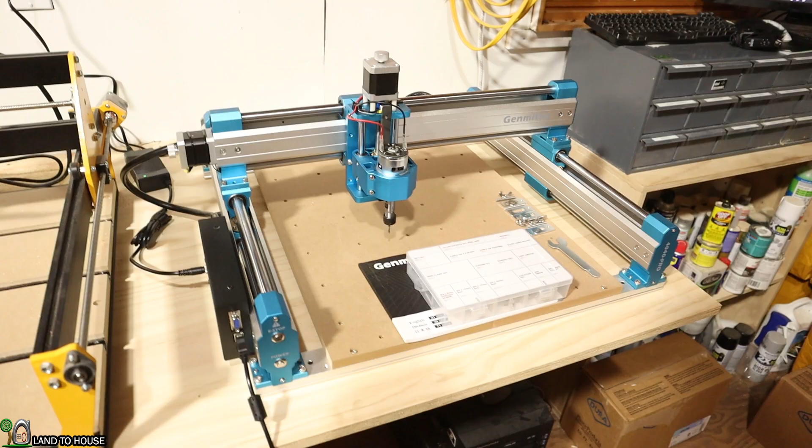Let's take a tour around this machine real quick. Now, some assembly is required. If you want to watch the assembly video, I'll have a link in the description down below where I put this thing together piece by piece. But let's go ahead and start off by doing a little tour around this machine.

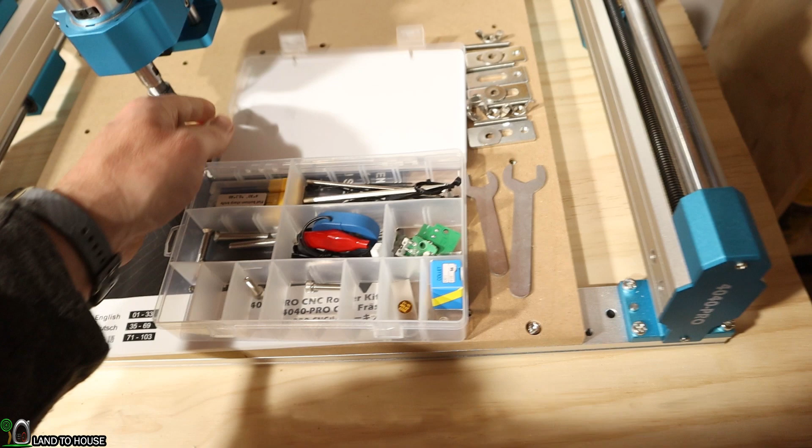So this is everything that comes with the machine. You've got some wrenches to adjust the spindle. It's also got some small clamps with various hardware needed to go into the MDF here. It's also got a little kit that has lots of goodies inside. Now I had all the hardware to assemble this. It's got some longer bolts, some different bits. You've got a Z probe and another collet and some more limit switches there. But the kit is really nice.

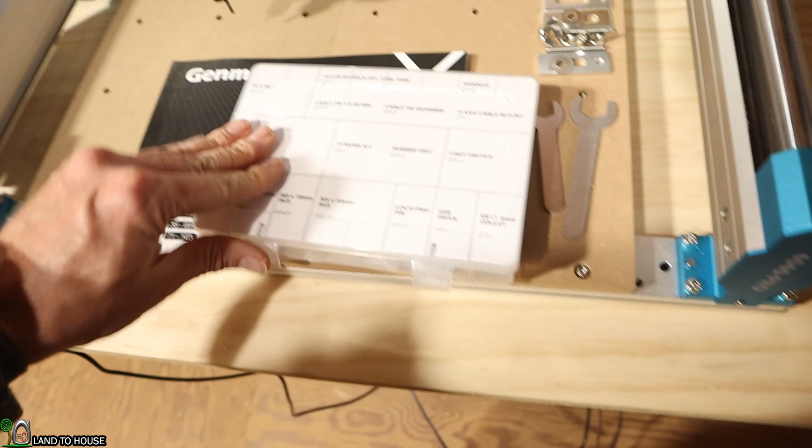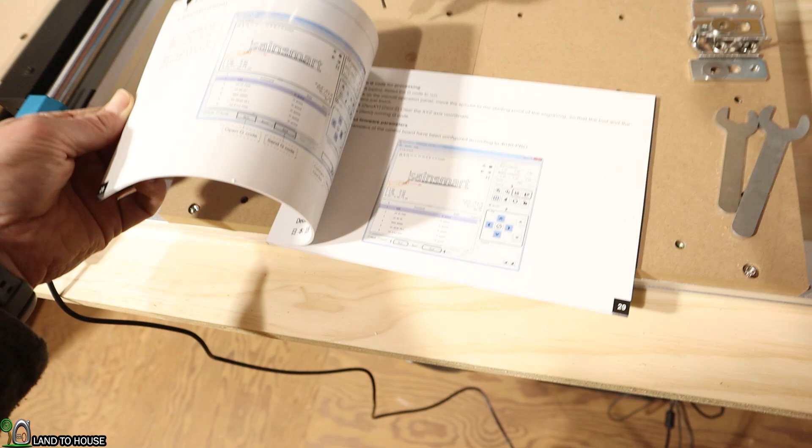And another thing that is really nice is the user manual. It's probably the cleanest I've seen in a while for an assembly, and it has nice color pictures that show you step by step how to get everything assembled here. It also has the how-to for getting all of your software installed, and that process was pretty easy as well.

Now I have another CNC machine over here that I had to unplug before this one would be picked up by Easel, but it is now working just fine.

So the only thing I don't really like about this machine so far is that the included clamps are rather small and a bit difficult to work with, since the MDF here has spaced these holes, and you can't always lock down the material you need with such a small clamp. But other than that, it's quite nice.

Let's take a tour of this CNC machine, starting here with the front right corner. This is the 4040 Pro model, as you can see written right here.

So to begin with, down here on the bottom, you have your front module, and then back here on the back, there is the back module. The only difference is the back module has the wiring in it, so you can connect to those stepper motors.

So in order to get the unit square, there are these pins that drop down, and that allows the two sides of the Y to fit down in there and make a nice square and level fit. I had 16 of these bolts go in there to hold that into position, and it was quite simple to get installed. If you'll notice, there is a glide rail on top and on bottom as well, which means this machine definitely slides very true to square.

It also hides that threaded rod down there, so it's hard to get anything to it. So it won't be binding up anyone's finger anytime soon. Definitely don't want to do that.

So on top of the two Y modules, you have got your X, and the X just has the same four bolts here on the side, same type of rail system, and it goes over here to this side.

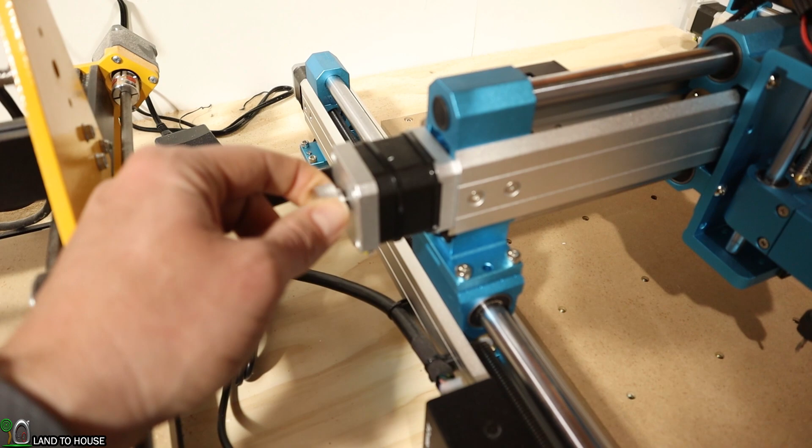Now you'll notice there is the stepper motor here, but it has a manual jog wheel on it, which is very handy if you need to adjust this out of the way while the machine is off. That same type of jog wheel is here on the Z-axis and also available here on both sides of the Y. You'd have to have both hands free to do that.

Moving over here to the Z-axis, the wiring on the spindle is kind of open, and it'd be nice if that were covered a bit, but so far hasn't been any problem. So this kit does have the wrenches here that you can use to adjust the spindle down there to replace the bit if you need to.

The unit does also have limit switches, so if I look up under here, you can see this right here is a limit switch. There are also limit switches on the other axis as well. Kind of hard to see, but there's one right down in there, and there's also one on this side over here. If we move over here, there is an E-stop up here which will turn the machine off, and also the power button down here.

Then you've got your control board over here on this side, which is perhaps a little bit awkward of a position. It'd be nice if this were placed back there in the back, because I like to keep my cords not hanging off the front of my work surface.

I like to have them back off the other side of the table so I don't brush into them. But as far as wiring goes, it was quite simple. Just had to hook up the spindle up here, had this limit switch, and also had the stepper motor there. Stepper motor is controlled up here with this. And then on the back, there are a couple of little wires that connect everything down there on those Y modules.

So, very nice machine, well built, and seems like it will do very good here in the future. You can replace this spindle with a bigger mount, so you could place something such as a Makita router in there if you want to step this up to a bit more power.

The Z probe would go into this connection right here, which is a bit awkward if you're going to be using that often, which most people are, and that cable is going to be sliding back and forth. You may have issues with that getting caught by the machine and torn up. So it'd be nice if the plug here were a bit more convenient to pop in and out, and not that style. Perhaps we'll see an improvement to that as this company moves forward.

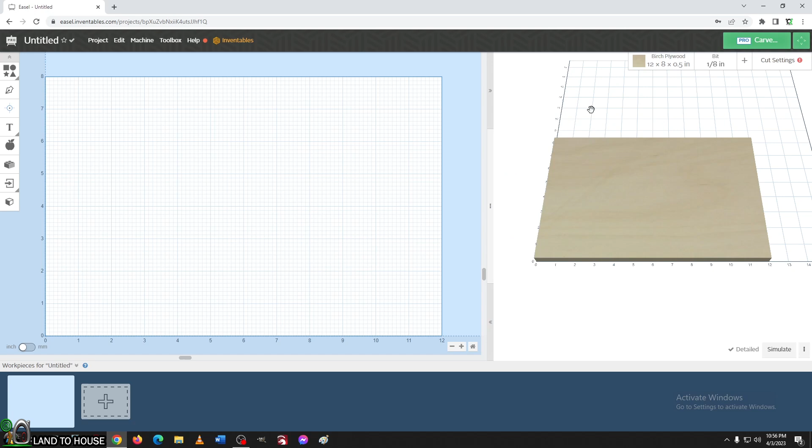Okay, now that you've seen the machine, let's go ahead and run our first project. I'm going to be using Easel, so let's jump on the computer real quick and find a design we like. The first thing I need to do is set up my material. So I know that this is going to be 7.5 inches, this is going to be 12.25, and the thickness is 0.75.

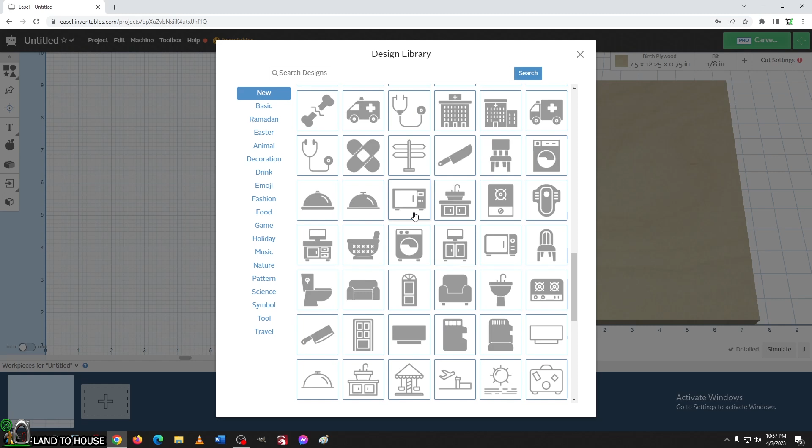There we go. So now let's go ahead and pick one of these designs that comes with Easel, and we'll go ahead and do our first test here with the CNC machine. Now there are tons and tons in here, but let's just pick something in the nature category. I used to live in New Mexico, so how about a cactus?

Let's do this one right here. There we go. Let's move this up a bit. We go over here to the cut and reduce this down to an eighth so we're not watching this for too long. Alright, let's go ahead and do a cut here.

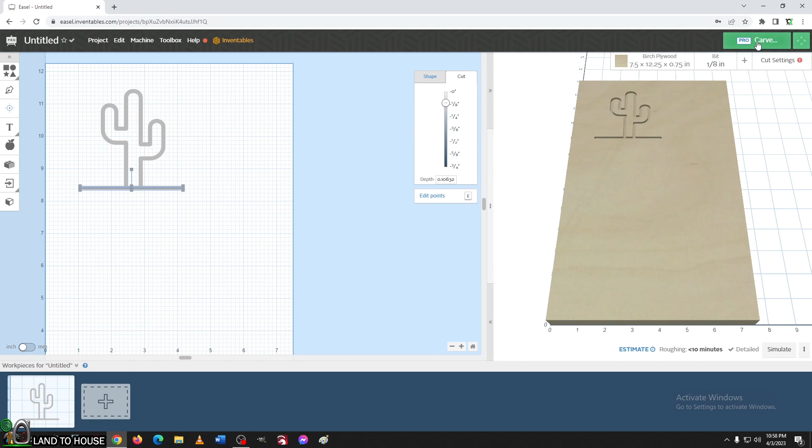Now the material is 3/4 inch. That's correct. Is it locked down? Not yet, let's go do that. I just have some plywood that I'm going to use here as our test material.

So the holes that are in this MDF have an insert inside of them that is threaded to allow these all-thread pieces to go into. So if I want to hold this piece down here, I'm just going to thread this in a couple of times and then take one of the clamps and put it on here. It's got a washer and then a little wing nut, and that's what they have included to allow the clamps here on our material.

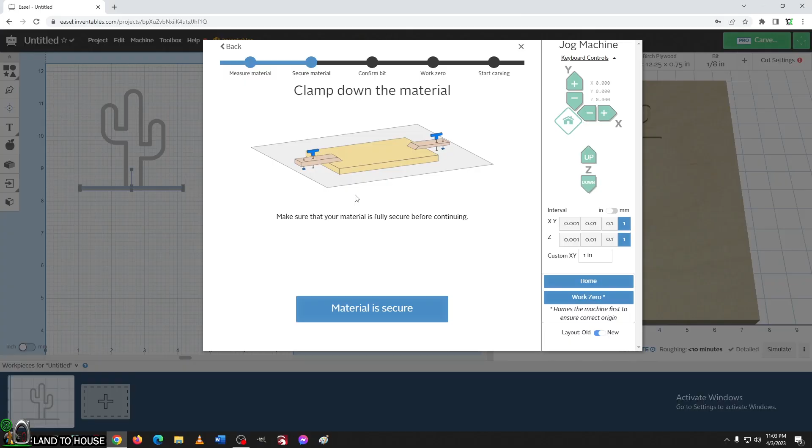The material is now locked down. Let's click that. I am using an 1/8 inch bit. And now Easel is asking to place the 0 point on the lower left corner. So let's do that now. I'm going to be using these arrows over here to jog the machine into position.

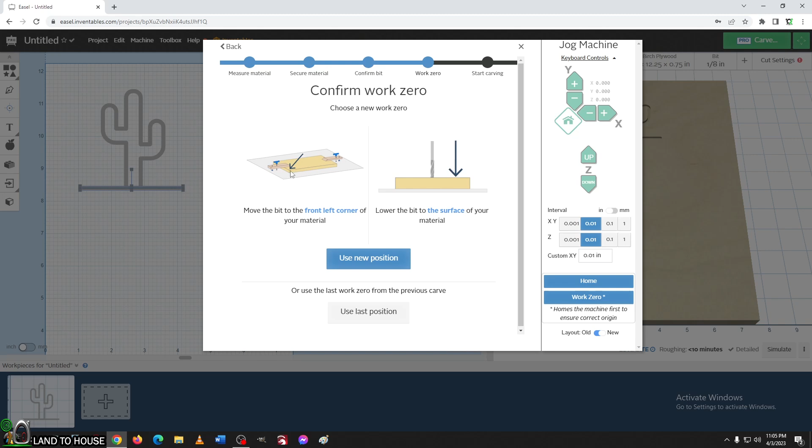I've placed my bit here on the front left corner. Let's go ahead and say use this new position. Let's raise the bit. Let's turn the spindle on. Alright, now we're ready to begin carving.

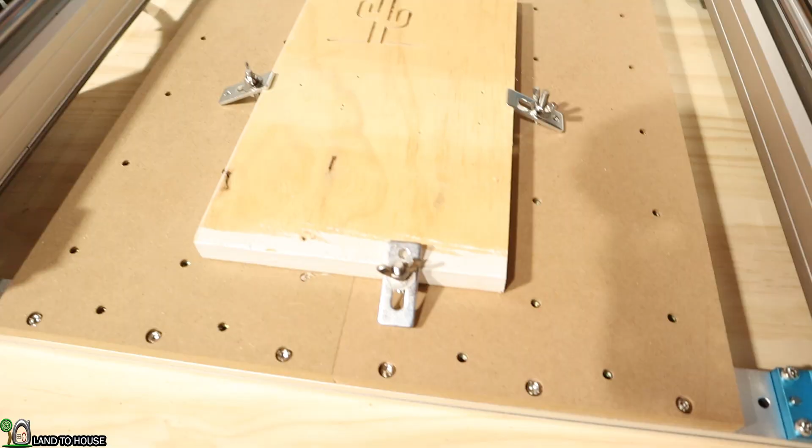As you can see, the clamps did work. They're just a little bit small. I've used bigger clamps now and like those a lot better, but to have those included is definitely good to begin with. I would definitely upgrade those at some point.

And that's my brief overview of the Sainsmart Genmitsu 4040 Pro CNC. If you want to watch the video where I do a full assembly, I'll have a link to that in the description down below. This machine was easy to put together and it has run flawlessly on my first project here.